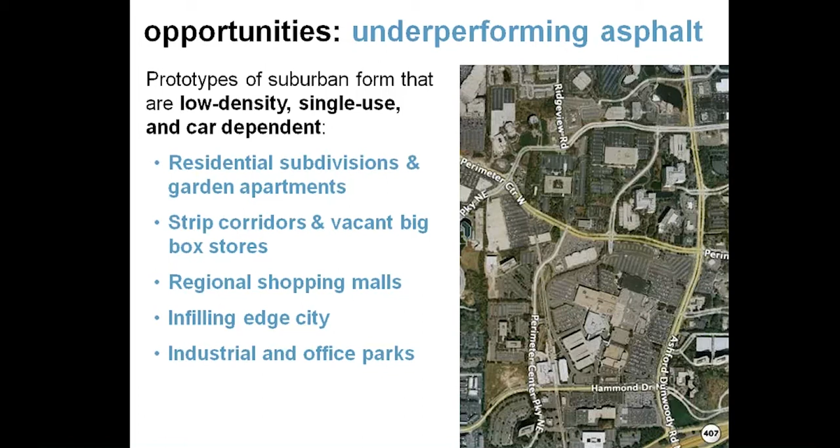So what are some of the dynamics driving retrofitting? There's the opportunity to mitigate the impacts of greenhouse gas emissions and climate change, because the average suburbanite has 3 times the carbon footprint of the average center city dweller. Poverty is on the rise in suburban areas, so there are now more people living in poverty in suburban areas than in center cities.

Public health concerns, chronic diseases associated with or correlated with sedentary lifestyles, and there's a lot of new research, some of you are probably quite familiar with this, from the public health community, recognizing that urban form and how we build our communities can lead to direct improvement and cost savings in the health area.

There's, of course, demographic change. I want to highlight that, the rise or increase in 1- and 2-person households associated with longevity. We spend a longer percentage of our lives in our non-child-rearing phase.

There's increased diversity in suburbs, and especially first suburbs, and I think this provides some opportunity. In the meeting earlier with developers, there was much hand-wringing about how resistant communities were in the Boston area. I think some of the communities that have experienced demographic change or turning more into ethnoburbs might be more ripe or conducive or welcoming to conversation about retrofitting and change.

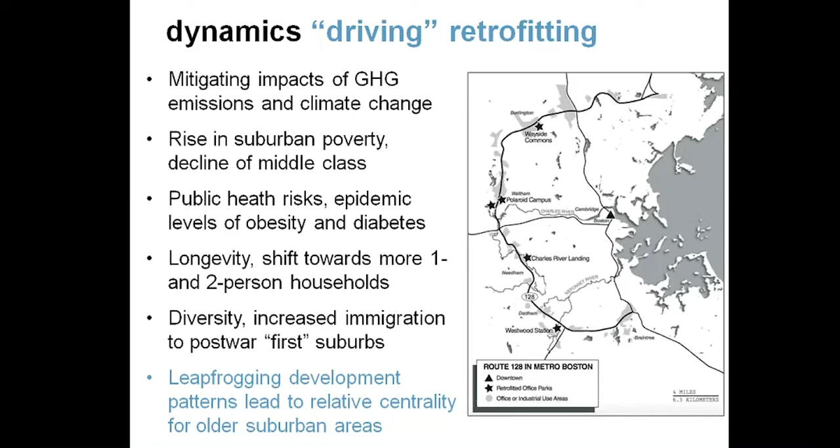So Ellen and I introduced the term incremental metropolitanism in our book to advocate for a polycentric vision for metropolitan areas that could be advanced by the retrofitting of appropriate sites. And we were discussing a little bit earlier here in Boston, you have very weak counties. I know you've organized into these regions, but what is the kind of polycentric future Boston? What would be the outlying centers that you would want to see densified and connected or networked to downtown Boston and Harvard Square, developed centers that are already known in the metropolitan area?

So the idea here is by advancing the retrofitting of appropriate sites, densifying and diversifying nodes along transit-served corridors on the one hand, and on the other hand, potentially de-densifying other sites, especially sites that could be targeted for ecological repair. So wetland sites that were filled in and perhaps never should have been, can that be rolled back in some kind of regional way?

So we identified 3 main strategies or approaches, and these came out of initially dozens of case studies that we studied, and now Ellen maintains a database with 1,400 or 1,500 examples that we collected and categorized, mostly by the pre-retrofitting types of all of the shopping malls, all of the office parks, all of the golf courses now is starting to be a category for retrofitting as well.

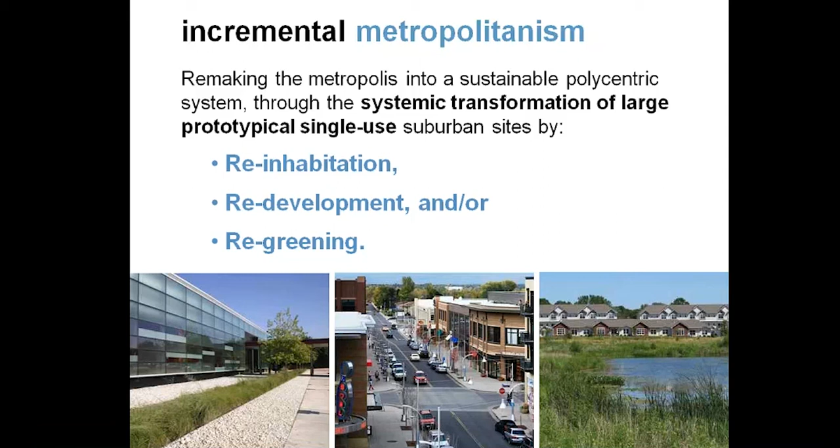And then regreening, which can range from the introduction, in our view, of small parks and plazas, adding to the civic realm, basically, in a suburban setting, to restoring wetlands, ecologies, and wildlife corridors at a larger, more regional scale. And these can be used alone or in combination. So I'll just go over each with a few examples.

So in many cases, the best strategy is to encourage and support reinhabitation, at least on a short-term basis, of older vacant retail sites with small community-oriented businesses, like those one finds serving immigrant communities in ethnoburb suburbs along the strip. Many ghost boxes, like this dead grocery store in Texas, have been converted to more community-serving uses. In this case, it's a branch public library.

So you see a new skin put on the bones of the old building, and also the parking lot has been re-inhabited and improved with drainage swales and new landscaping and so on. So there's an improvement here, although it hasn't really changed the surrounding morphology.

There's also potential of food to turn a place around. So this is the strip center in Phoenix that was given a coat of bright orange paint and some new shade structures, and it's become a third place for its neighborhood. So instead of having a dry cleaner and nail salon and not so popular businesses, it's a real community gathering place. So from strip to hip in its neighborhood.

Then there have been dozens of retrofits of malls and big boxes for meds and eds uses. So on the upper right, the upper level of the 100 Oaks Mall in Nashville was taken over by the community health services of Vanderbilt University. So the inline stores have become medical suites for each of the specialties for outpatient visits and so on, and they use the food court, so you can get a snack or a coffee before and after your medical appointment.

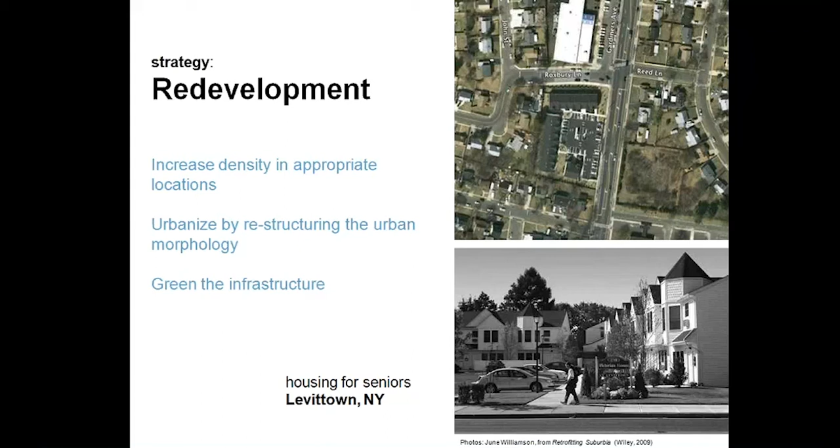This is the smallest scale example in iconic Levittown on Long Island, where you have a monoculture of detached houses. And this was a little commercial strip that was redeveloped into subsidized townhouses for seniors. So this is a place for folks who are already living in the community to downsize out of their detached house and find a different housing choice within their existing community.

This is an example of a big box store that was demolished and the site was redeveloped for a community center. This is in Arlington, Virginia, and the neighborhood here has 40% foreign-born, 2/3 non-white. This is a diversified neighborhood, and the gym serves kids and teens and also the older population.

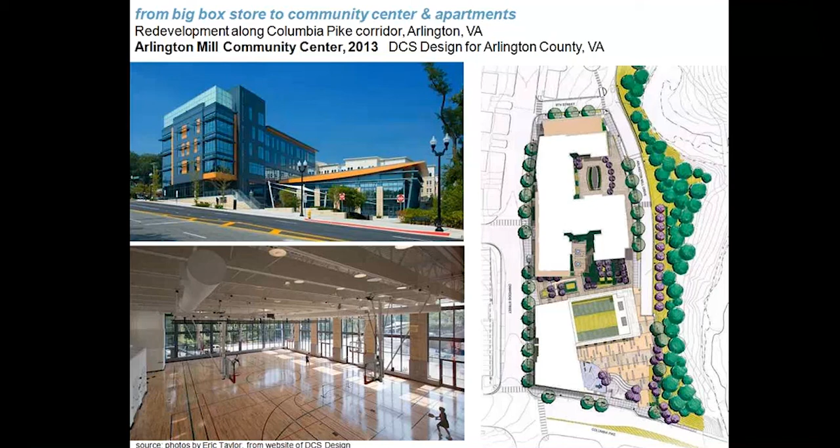And then there's 122 affordable housing units in the back building, 12 of them barrier-free, so it's serving seniors and disabled. It's a very attractive building right up on the sidewalk. And this is part of the corridor, the Columbia Pike corridor in Arlington, that has a form-based code overlay that's been implemented in 2 phases.

So the project I just showed you is in, can you see it? Oh, it's just a big picture.

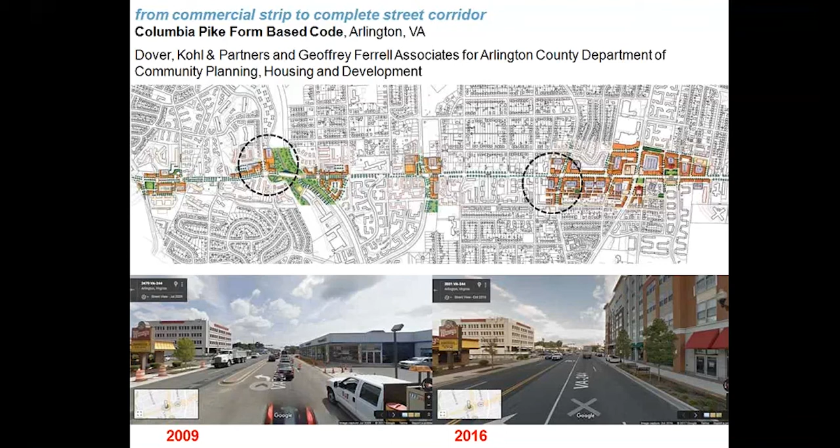In this node there, and then these images on the bottom are this other node where you can see sort of one-story auto-oriented car showrooms and things being gradually replaced with multi-level housing buildings, and the whole street has been remade. So instead of this median, that dimension has been transferred into widened sidewalks on each side with the green strips and benches and so on. So it's sort of a public and private working together.

And then this is redevelopment of a regional shopping mall. This is one of the primary case study examples in Retrofitting Suburbia. This is Belmar in Lakewood, outside of Denver. So you had a regional shopping mall and a 106-acre campus-type parcel, and it was a public-private partnership. So the municipality, working with Continuum Partners, a developer out of downtown Denver, and Elkus Manfredi of Boston, who are the urban designers, to sort of restructure this into 22 urban walkable mixed-use blocks.

And the land of the new streets was deeded into public ownership. So those are public streets, so they're going to have resiliency over time, and you have the opportunity to differentiate each block. So it's not a matter of the whole mall fails and it's like dominoes falling down or collapsing, that any particular piece of this going forward, an individual building could get redeveloped, new uses could get put in, something that was conceived of as retail might turn into some other use over time.

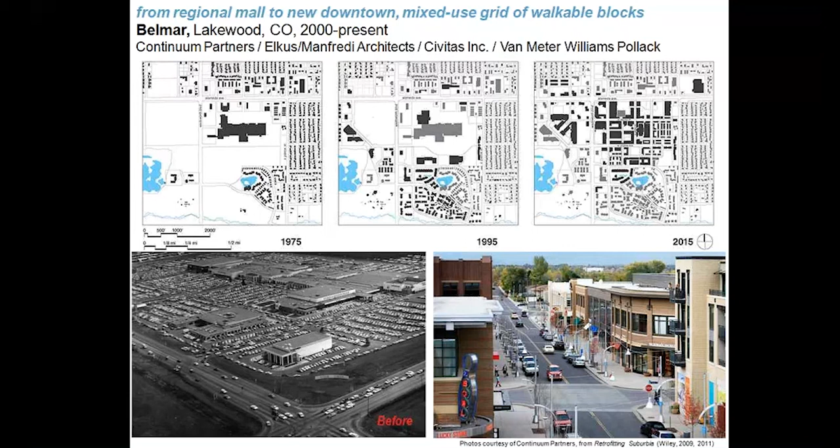So that's an idea about resiliency, to make what had been a kind of one development that's really the size of an urban downtown, and to truly think about it that way and steward it going forward. So I think that's pretty significant. And what they did here too in laying out the new streets was a design piece, was to line up the streets with the grid of the adjacent subdivision, so that it's not a kind of enclave that only refers back to itself, but it connects up and across the arterial.

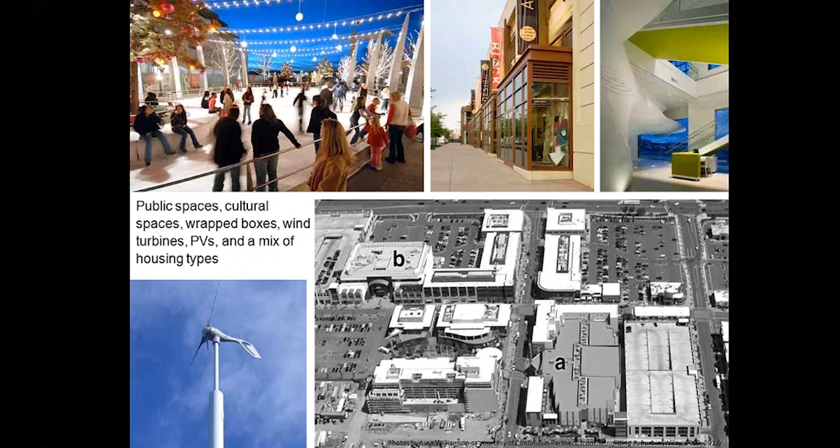So these are some examples, but it's hybrid, because you're still developing at this time, 10 years ago, at the suburban price points and wanting to have kind of suburban type development themes. So you have multiplex cinema, but it's embedded in the block. Or here, this is one of the anchor stores from the shopping mall. It had been built later than the rest of the mall, and it was deemed salvageable. So that building was kept and wrapped with a liner of office over retail and embedded into the new morphology, the new block structure. So it's kind of hybrid with these big boxes meshed into the grid.

Third strategy, regreening. And so again, this is the potential for some de-densification. So we know vacant properties can be converted into gardens and parks that can help stabilize the values of the properties surrounding them. And regreening is also an opportunity to restore the local regional ecology.

So this is an example in the Phalen neighborhood of St. Paul in Minnesota, where a wetland had been filled in to build this strip center. And you can see the image in the middle. They'd always had drainage and flooding problems in the parking lot because it wanted to be a wetland. So the property was torn up and the wetland was reestablished, reconstructed, and new housing then was built around it. So it's serving this stormwater and ecological function.

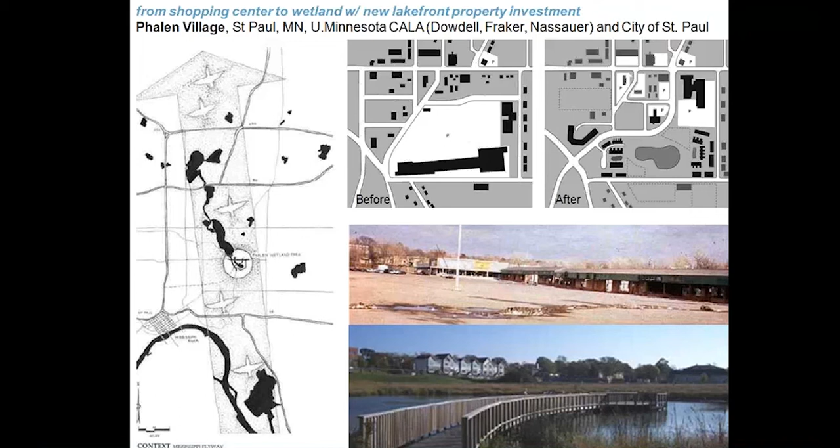It's also in a bird migration corridor. That's what this diagram shows. The origins of this project came out of design research done at the university in the landscape architecture department. So you have the reconstructed wetland that's doing an ecological function, but also is an amenity for the new housing around it. And this is in a relatively distressed neighborhood in St. Paul. And I was there a year ago, and there was a hawk hunting. So the migrating birds are definitely using the lake.

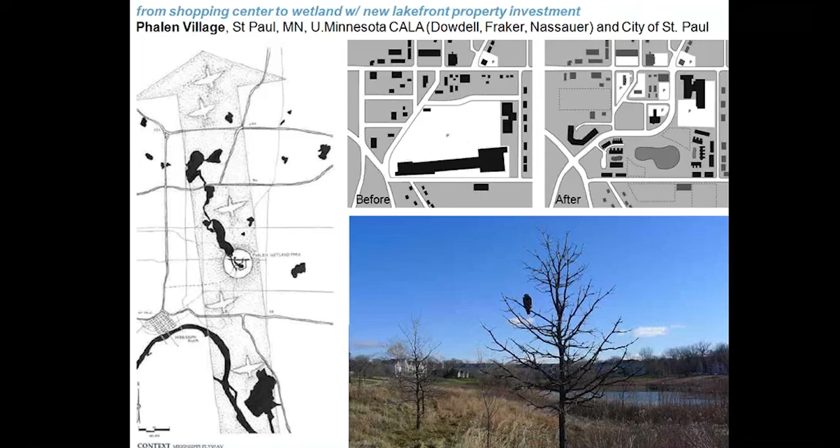This is an example that kind of brings all three strategies together. This is the Northgate Mall in Seattle. This is a historic mall. It was designed by John Graham, the first mall where he innovated the now classic dumbbell mall type, where you have anchor stores at each end and a food court in the middle, and a relatively narrow concourse with the inline stores all along it. So it's a thriving mall. It's still full, and they've added new additions to it.

It's Simon Properties, but they have too much surface parking lot. So these overflow lots at the south were rarely used, and the land actually slopes down because it was the headwaters of Thornton Creek that drains 680 acres of runoff of the surrounding area that had been put into a 5 or 6 foot diameter culvert pipe underneath 60 years ago. So environmentalists wanted to daylight this and make it all into a park. There was a negotiated solution.

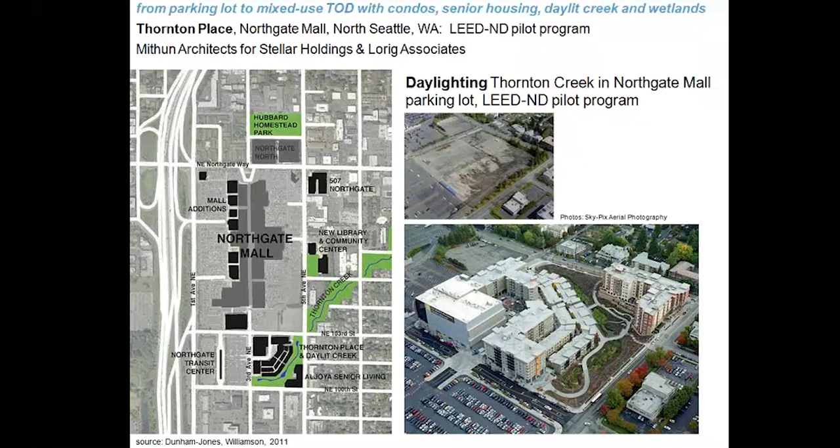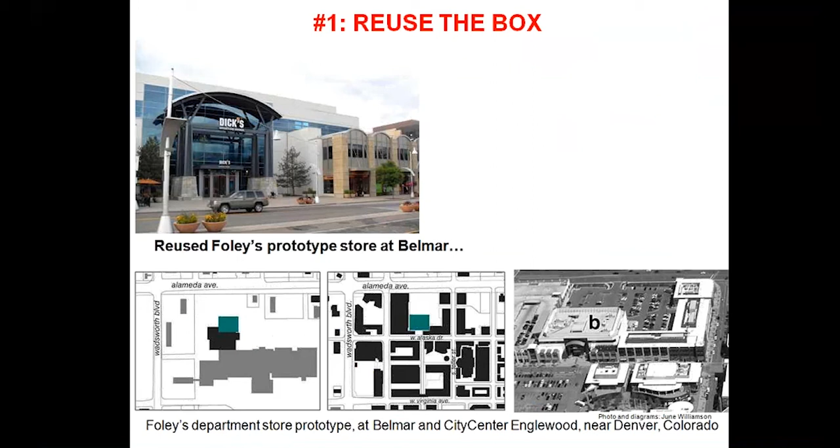So now I want to quickly talk about these 11 tactics that support the 3 strategies derived from the case study research. So first is reuse the box. I'll just go through super quickly. This is the example I already showed you from Belmar, and all of the reinhabitation examples can fit in this category. Providing environmental repair. This is just a zoom in of the Thornton Creek water quality channel that I mentioned earlier. And there's a kind of public education piece of this. So these are little markers of the water quality. And there's signage and other ways to explain to people the ecological function of this park.

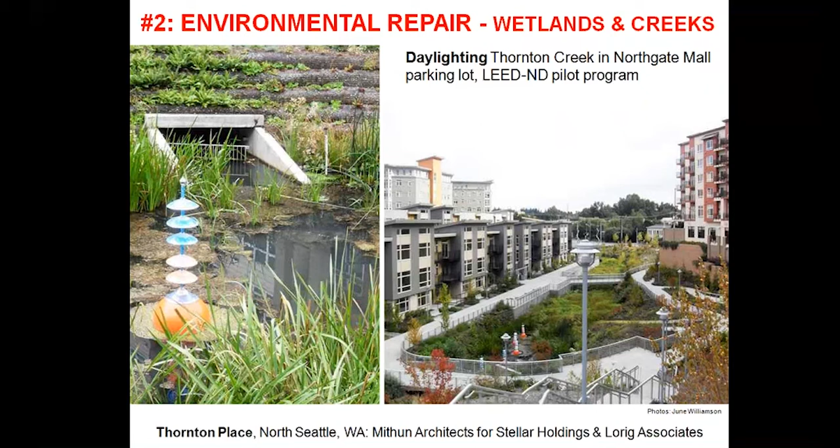Revised zoning and public works standards. One example is the ITE manual for designing walkable urban thoroughfares. I'm working on a project right now at City College with a colleague in the civil engineering department for a manual on accommodating freight vehicles in complete streets projects. So there's more that's being understood about how to thread these things together in a sensitive way. And then, of course, thinking about zoning.

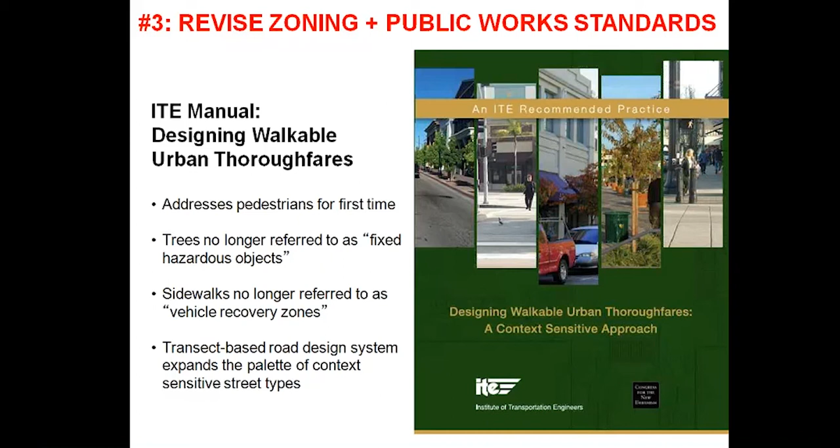Another tactic, walkable blocks, and getting the dimensions right. So the rule of thumb is a perimeter not to exceed 1,800 feet. Blocks larger than that, without paseos or walkways through them, are really not going to be walkable. And also trying to get up to that threshold of 8 dwelling units per acre to support transit is a piece of this as well.

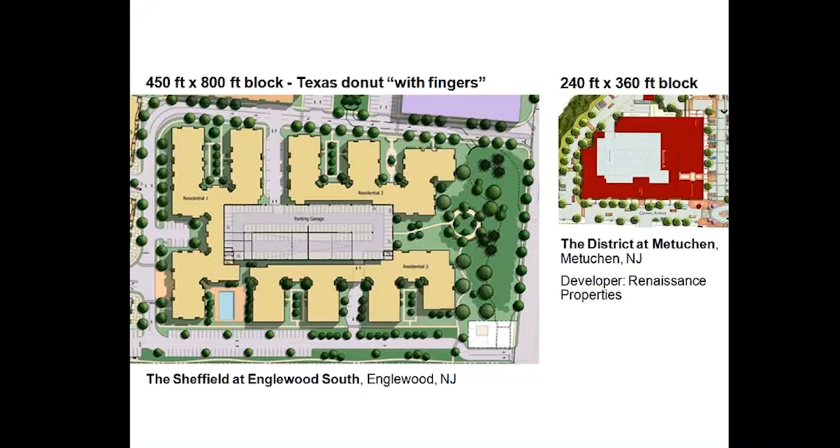And this is an example of how not to do it. I should have a big X over the one on the left. So this is the appearance of urbanism in the suburbs, but it's overscaled. It's like a Frankenstein version of the Texas donut with fingers. And so you end up with a completely non-walkable block. It's completely auto-oriented versus the more properly scaled example on the right. So we have to beware; this really should be 4 blocks in the example on the left.

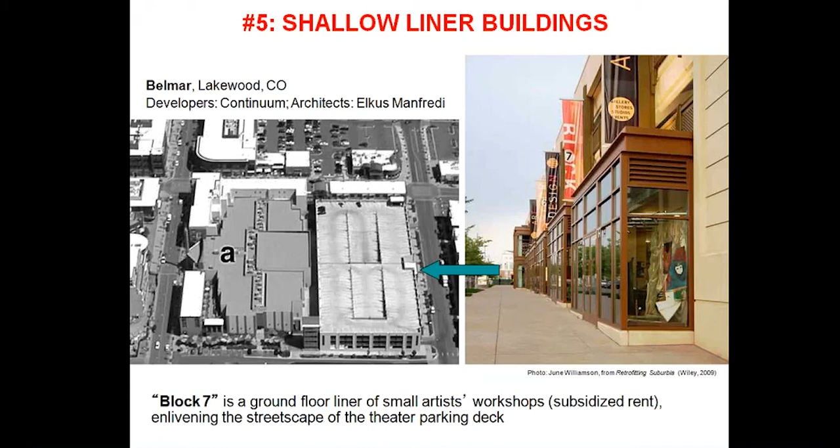Use shallow liner buildings. This is back to Belmar, but the parking structure there, the ground floor that faces across the street, onto residential use, townhouses, is subsidized artist studios. So just 20 foot deep, the depth of a standard parking space, 18, 20 foot deep, is enlivened with these artists who are there during the day, at night, and on weekends. So that's not a dead blank facade.

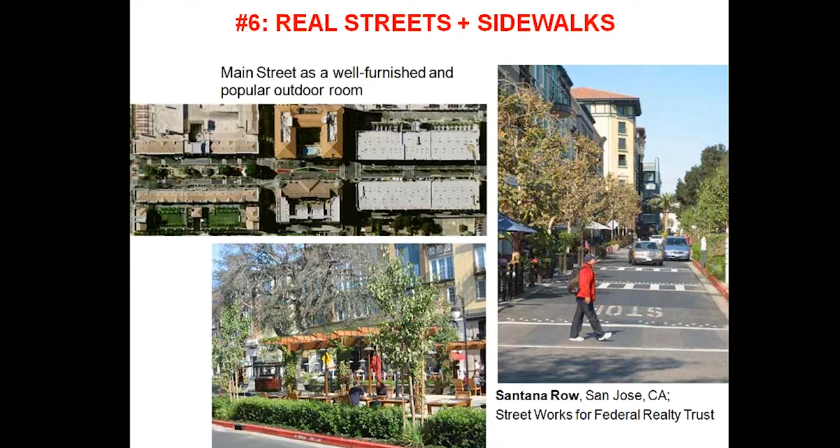Real streets and sidewalks, and this again is where urban design and a sensitivity to design comes in, because you see retrofits where they're trying to do a street, but it's overly wide and the buildings on each side are too low, to get in extra angled parking or whatever it is. So one example we can point to is Santana Row. Street Works designed this for Federal Realty Trust. It's the same team that did Assembly Row and Bethesda Row, but it really is nicely proportioned, the width of that central street to the height of the building framing.

Connectivity. So this example is unbuilt, but it's a proposed retrofit of a garden apartment complex outside Indianapolis that's organized around a golf course that just had one gated point of entry. So that guarantees an auto-oriented experience. And the proposed retrofit increased the points of connection from 1 to 11 by just opening up potentially at all these points where the neighboring streets are located.

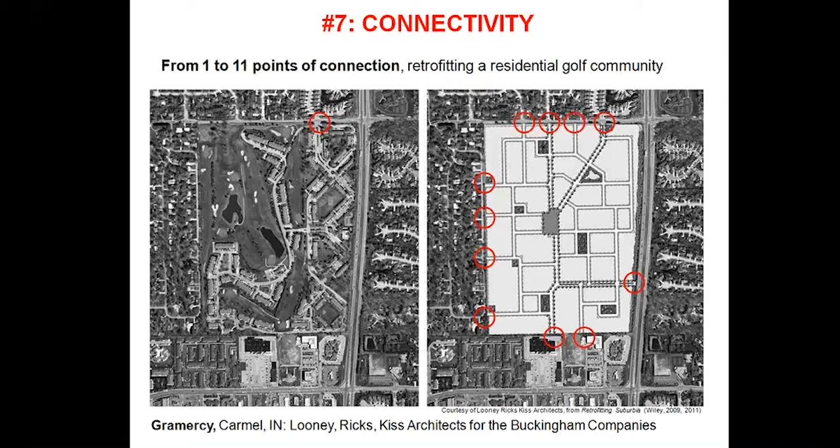Future connectivity and adaptability. So often there's resistance to adding increased density at the outset, but that doesn't foreclose the possibility in the future. So a sensitive urban design will still leave open the options for making connections in the future. So at Belmar, this strip of land was not part of the retrofit, but the streets still line up rather than enclosing on themselves, so that if that property gets retrofitted in the future, those connections could be made.

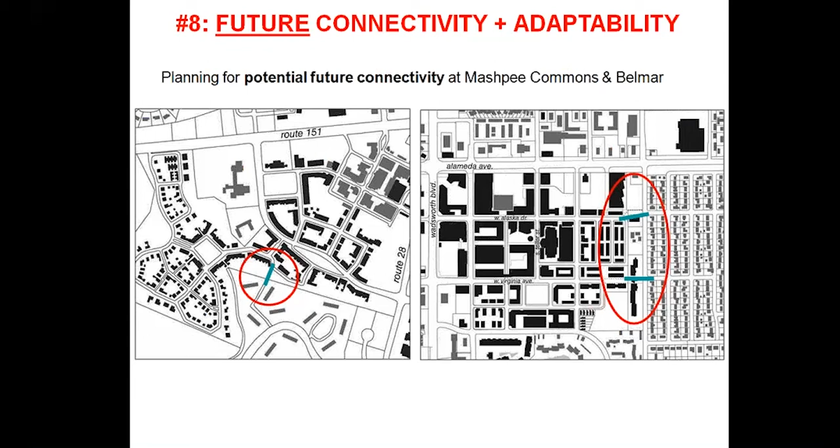Or at Mashpee Commons, similarly, this complex was worried about through traffic and other kinds of things, and they could just close that off and put in a few more houses. But instead, if you leave the stub out, sometime in the future, if the conditions change, those connections could be made.

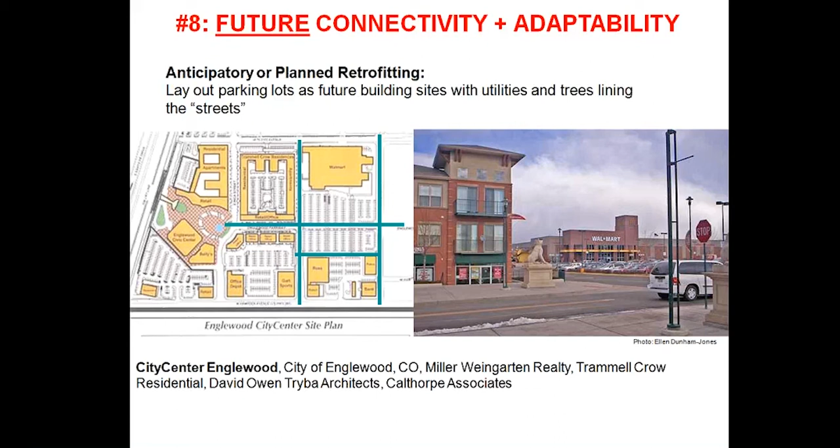Or in this example, where it's still relatively low density, you've got the Walmart. This is along the Denver light rail, but laying out those parking lots and where the aisles are to be future streets, and locating the utilities along those corridors, not just laying them out diagonally at the shortest distance between 2 points, can reduce the cost later of retrofitting because you've already got the utilities laid out for that.

Diversity in housing choice and price. This is the big one. This is about having more choices in the suburbs. You're not making people leave their houses that they love and they own. It's about choices for your children, for your parents, for your neighbors and friends.

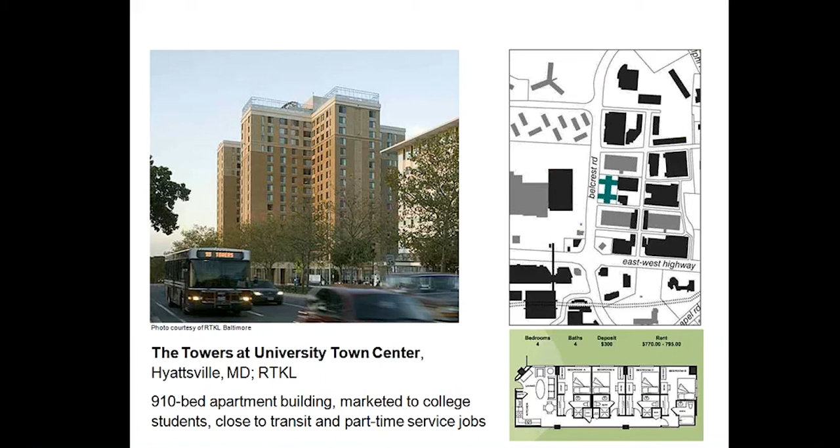This is one example. It's not a beautiful building, but this is in a retrofit in Hyattsville, Maryland, Prince George's County. 4 bedroom, 4 bath units. So this is marketed to college students. University of Maryland is nearby. That idea that these 1 to 2 person households, or even 4 person households with sharing, if the unit types are made available and developed.

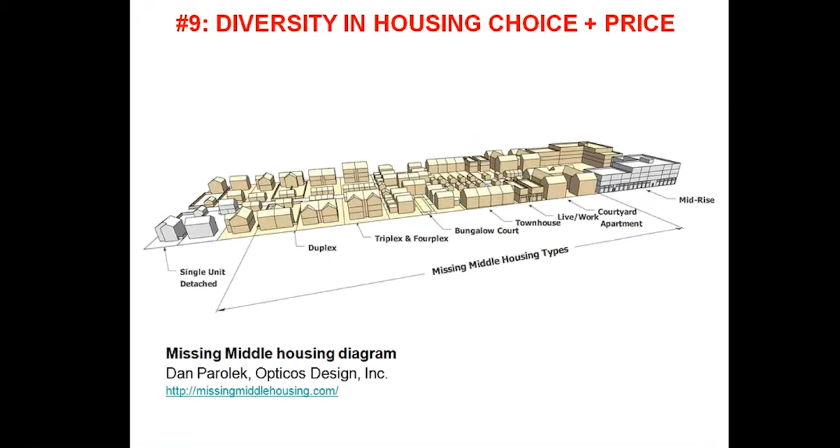Adding housing units to existing neighborhoods. So one way to do this is to allow accessory dwelling units, attached or detached. This has become very popular in the Pacific Northwest. So many municipalities have allowed accessory dwelling units or detached accessory dwelling units, and they don't all happen at once. They happen very gradually and slowly over time, if you can get the initial acceptance.

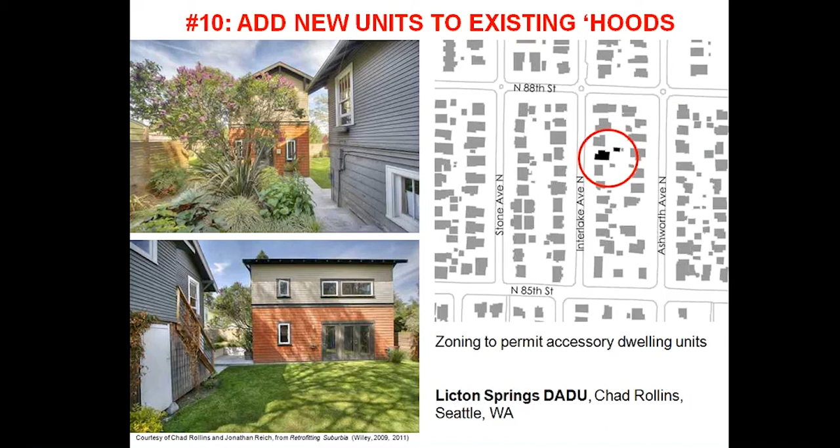What they did is, here was a design competition. So this is one of 3 examples that were sponsored through a design competition to help lessen the objections to making this a zone change. It's really very attractive at that point.

Which brings us to investing in quality architecture. I should have emphasized this more with the developers this morning. It's a huge problem on Long Island: they're starting to build mixed-use, on-the-sidewalk projects around Long Island, but they're all so ugly. And part of it is because the design quality of the facade is very thin, so it's vinyl windows without any depth or reveal or shadows.

And when you're up close to a building designed that way, it's not that pleasant. It's one thing if it's set back 50 or 100 feet from the road, or you're driving past it, but when you're walking past it, quality matters. Anyway, that's just a side rant.

One of the ways I've done this is get involved with competitions of various kinds to try and get more speculative ideas, but also built ideas in circulation. It's like enlarging the gene pool of design ideas for suburban communities. And the two I've been very involved with: the Build a Better Burb on Long Island.

So that began as a design competition that I helped organize with the Rauch Foundation, building on an RPA study that they've commissioned to document all the vacant land and surface parking lots within a half-mile radius of every Long Island Railroad train station and Main Street on Long Island, so 156 locations. And we opened it up as an international design competition. What would you do with this vacant land?

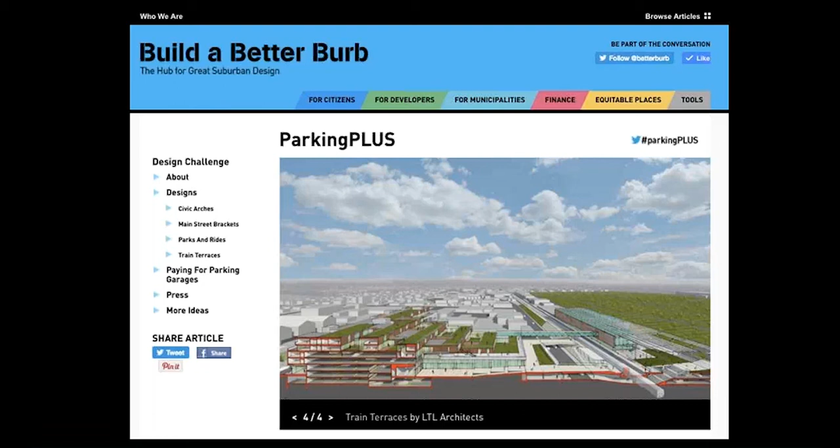A second project I did with them 3 years ago, I guess, was Parking Plus. And this was a more targeted, invited design challenge where we paired 4 design teams with 4 municipalities. So we had buy-in from the mayors and elected officials. This was looking at municipally owned surface parking, either owned by the municipality or owned by the Long Island Railroad, next to these train stations in these 4 communities.

And the premise was surface parking lots take up a lot of land. You consolidate it in a 4-story parking structure, no loss of parking spaces. So there was conservation of parking spaces, but then you would free up 3/4 of the land for other uses. And what other uses would you put there? So we had 4 very provocative schemes that came out of this. I'll just show you the one for Rockville Centre that was designed by LTL, I think, here in Boston. They did a really great job.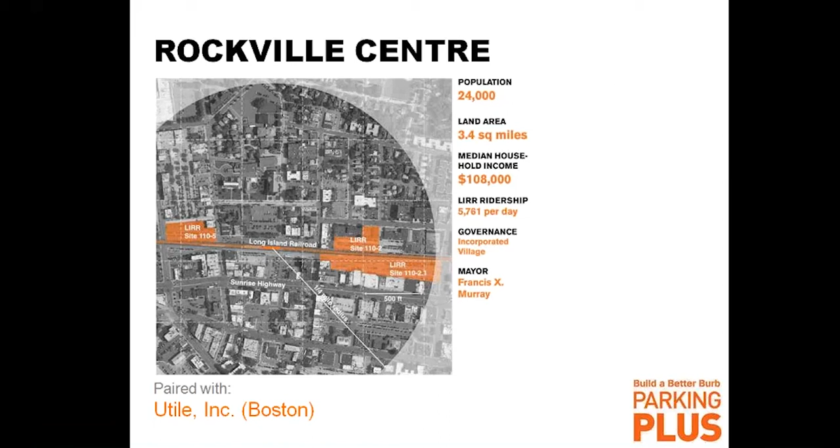And here, the Long Island Railroad is elevated, and they targeted 3 out of 11 municipal parking lots to do kind of prototype parking structures that would have flat plates, the idea being they could possibly be re-inhabited for other uses in the future when private automobile use maybe is reduced.

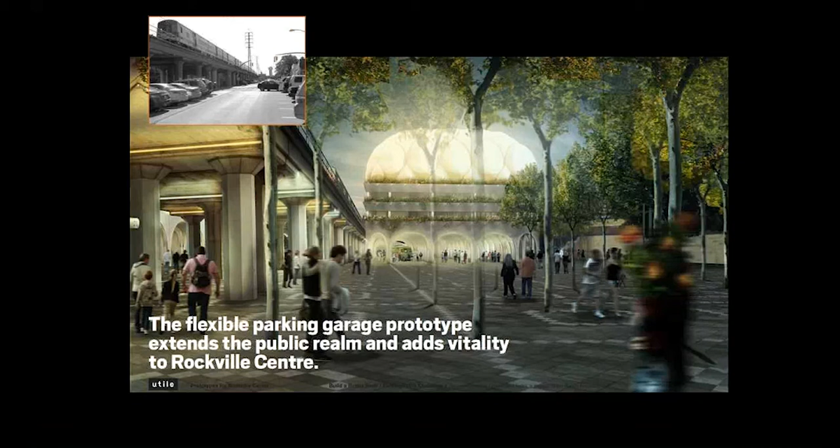And the first story was double height with these arches, the idea being that during the week, commuters would park there, but on the weekends and the evenings, that space could be repurposed as a covered public plaza for markets and other kinds of events, so to really make it a civic space. And these are some of the images. So those are the 3 prototype parking structures that kind of plugged in to the elevated Long Island Railroad. And it was also an idea that this could link into some regional set of park structures.

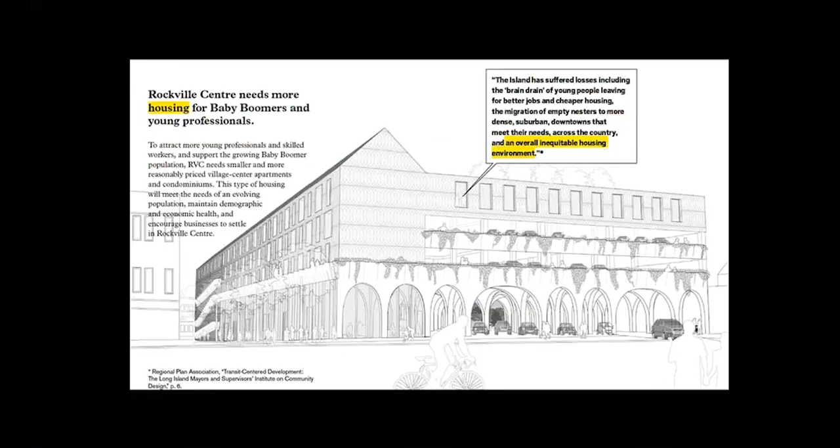And this was just an image showing the potential reinhabitation of one of those parking structures as housing, and then a rendering of what the first story with the higher ceiling might look like on a weekend as a public market.

So, if we have time for some questions. Yeah. Hi, thank you. You mentioned at the beginning of your talk that a lot of communities are sort of changing, and whether or not the community wants it, you still have to factor in the market. And I'm just curious, all your ideas are really interesting, but how do you get the community or developers to sign on to something like this?